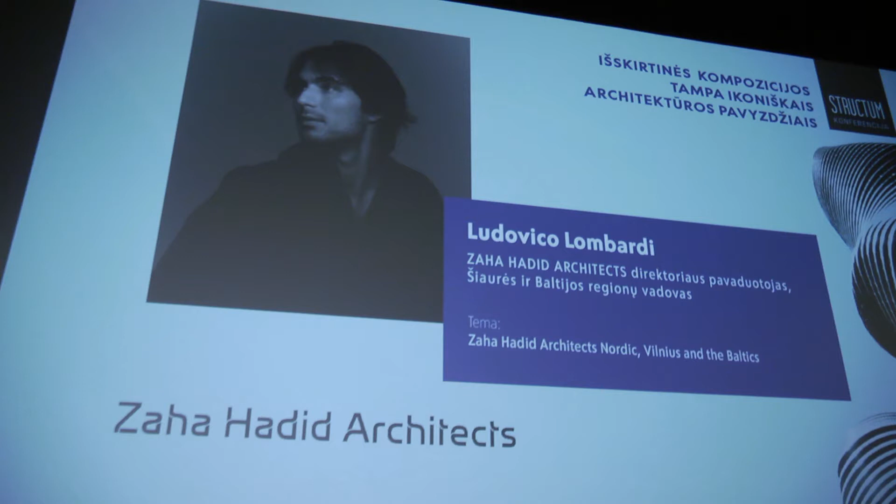So the presentation, of course, starts with ZHA and Zaha Hadid Architects. We have an international practice. We have offices in Europe and in New York, Beijing, Hong Kong, and hopefully soon other presence in the Nordics. We work globally, and our experience is varying in a lot of different typologies, ranging from cultural buildings to mixed use, offices, infrastructure, sports, and we try to contribute with our design intention in every sector that surrounds us.

We have a good portfolio of cultural projects. I'm not going to go into the details of any of them, but we will see some later on. Residential and hospitality, education and sports, and then transport. And ZHA started with a very strong tension about composition and about a visionary idea of representation in order to describe space and the complexity of space and the society dwelling in those spaces.

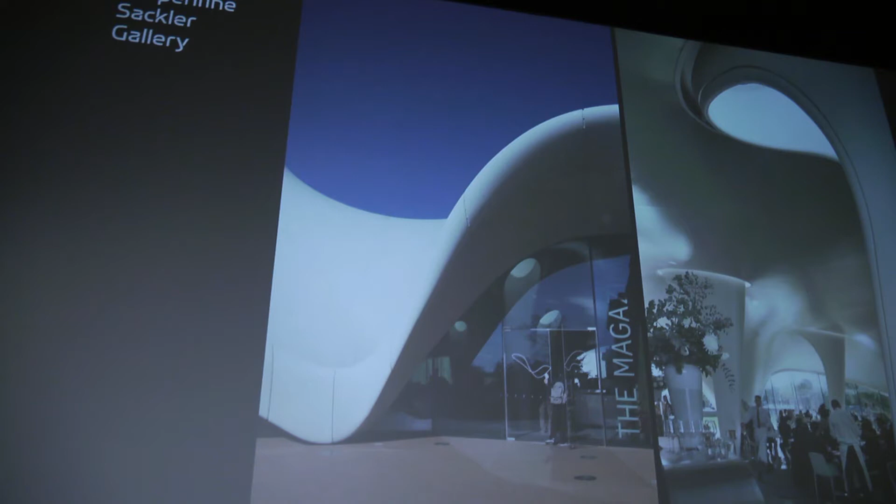We deal with different contexts. This is a project in London. It's an expansion of a heritage building. It's called the Serpentine Sackler Gallery. And we wanted to contribute with a complete juxtaposition of an existing heritage building with something completely new and somehow contrasting yet complementing the language of the context.

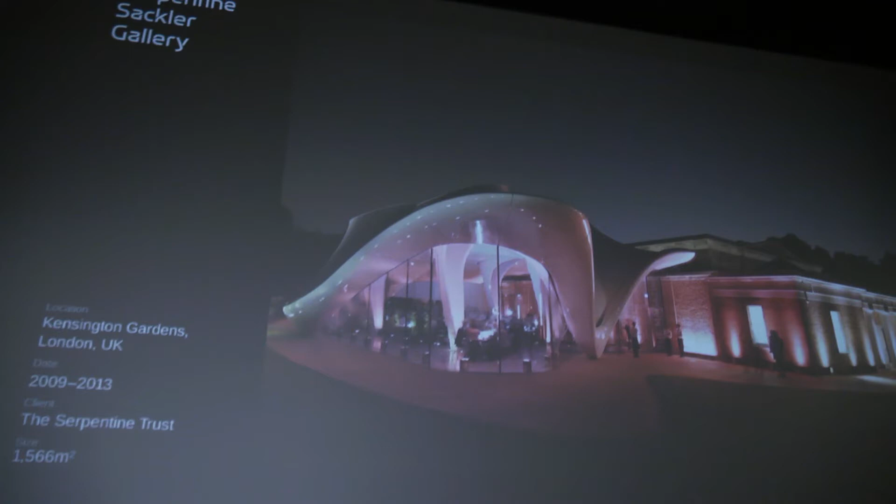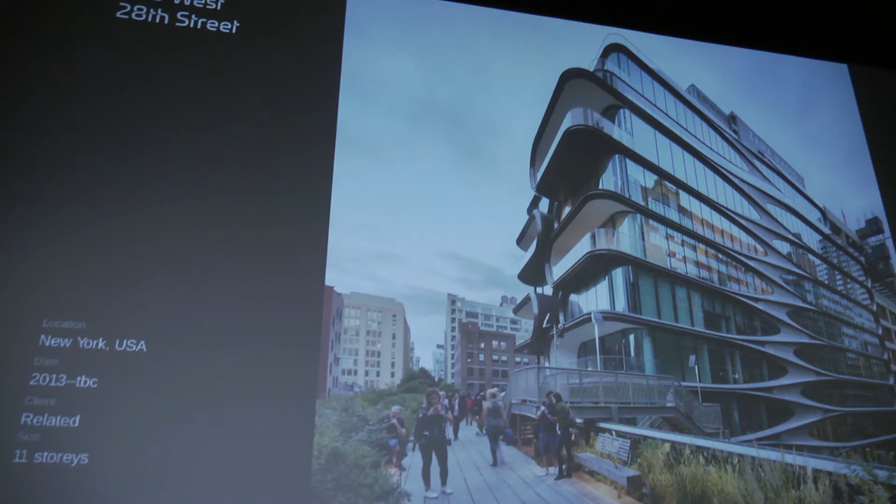We deal with a lot of different conditions. This is in New York. It's a recently completed project. It's a residential building. And this building has to deal with the rigidity of the Manhattan grid, which is, of course, a very interesting challenge, yet trying to create something which is dynamic in our own language. So in this case, we use the privacy between the different units to create this balcony articulation and a playful facade towards the High Line in order to create a more dynamic intervention into the block system of New York.

When we talk about context and sustainability, we normally don't only work on environmental sustainability. We also work a lot with what we consider social and economical sustainability, which are two very important aspects of sustainability in general as a direction to strive for.

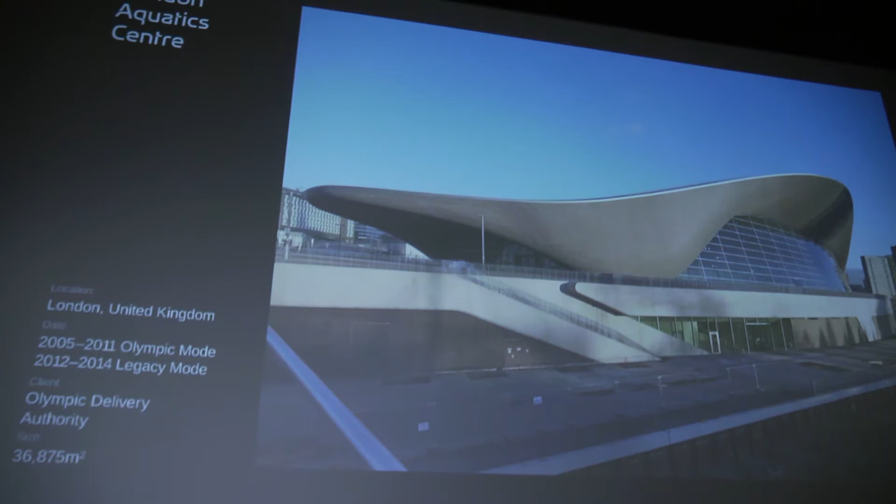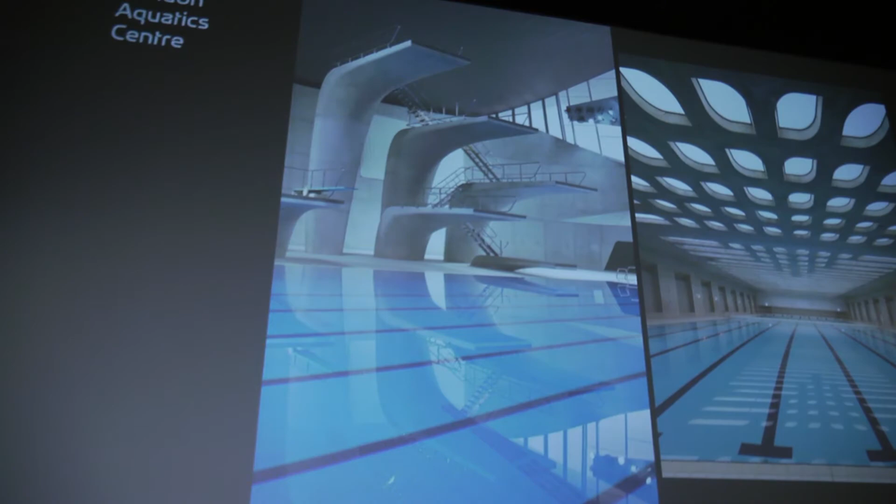This project is an Olympic pool, so it was done in a very fast track time, very tight budget for the Olympics in London. But when we designed it, we always had to keep in mind that the Olympic Games are a very short time span compared to the investment, and the pool was going to remain afterwards. So how can we design a building that can work in Olympic mode for a very limited time, but also can work afterwards as a community pool.

I mean, this is now open to the public. You pay, I think, €2.50 to go in and swim. And it's one of the most successful venues of the Stratford area where the Olympics took place. And the only way we managed to make a smaller, more intimate experience for schools and the community around the area was to engineer a roof system that's standing only on two points. So you can detach and reattach the facade and add extra seating when it's needed for big events, or otherwise bring back the facade and make a more intimate experience, which is more of a human scale.

So of course, the Olympic brief was not really targeted to the legacy mode, but as designers, we have the responsibility, when building such a venue with such an investment from different stakeholders, to also think about how it's socially sustainable in the long run.

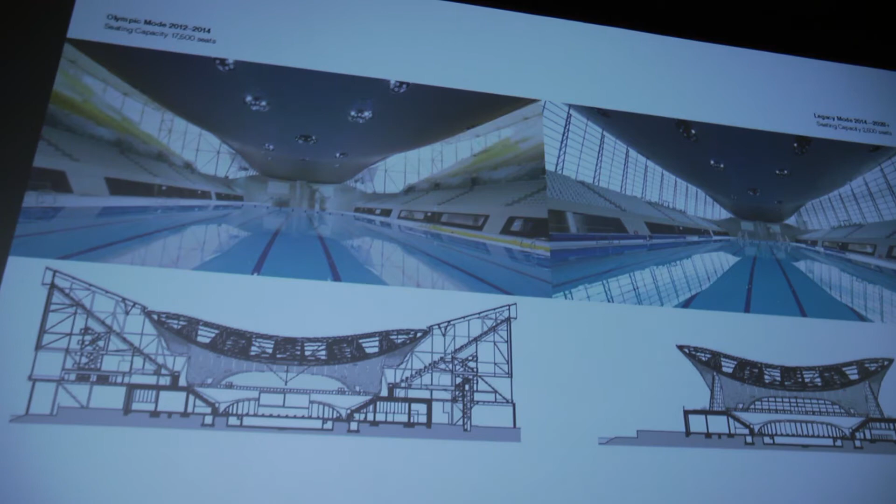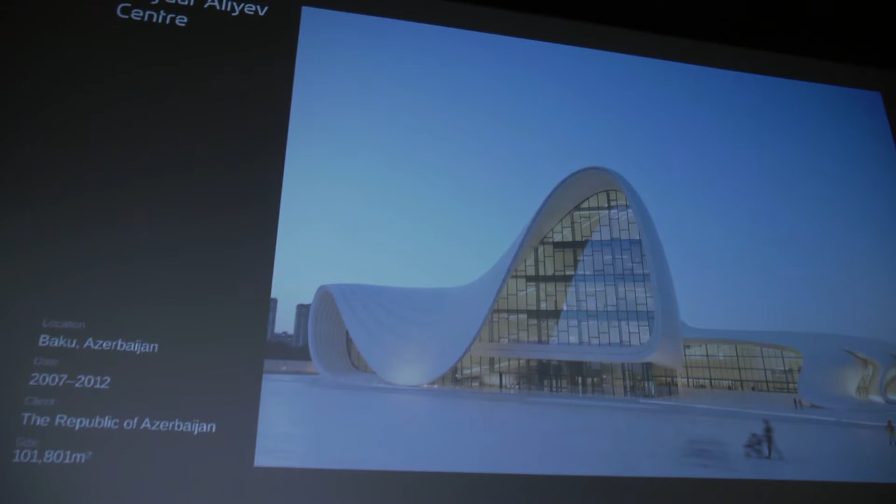Another aspect of our office is definitely the research part. So when we design any sort of building, we want to make sure that what we design, what we sketch, is actually buildable, and that the end result has the same quality of the initial ideas that we put into the project. So this is a project in Baku.

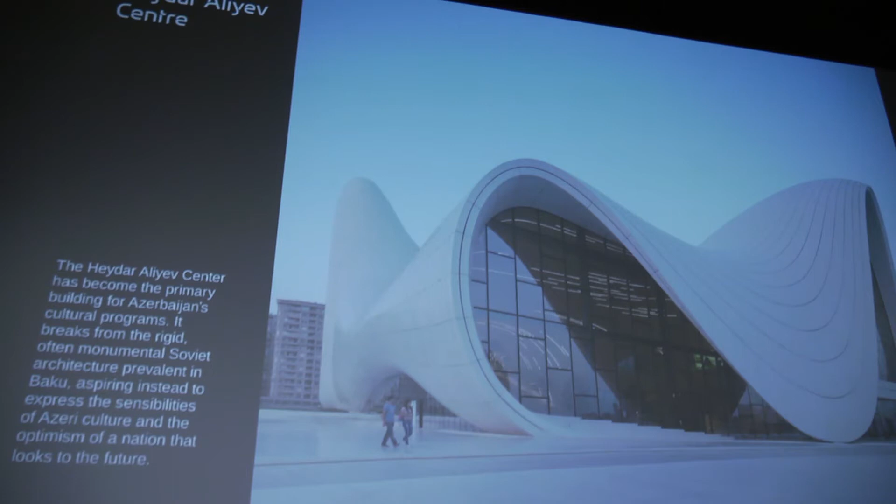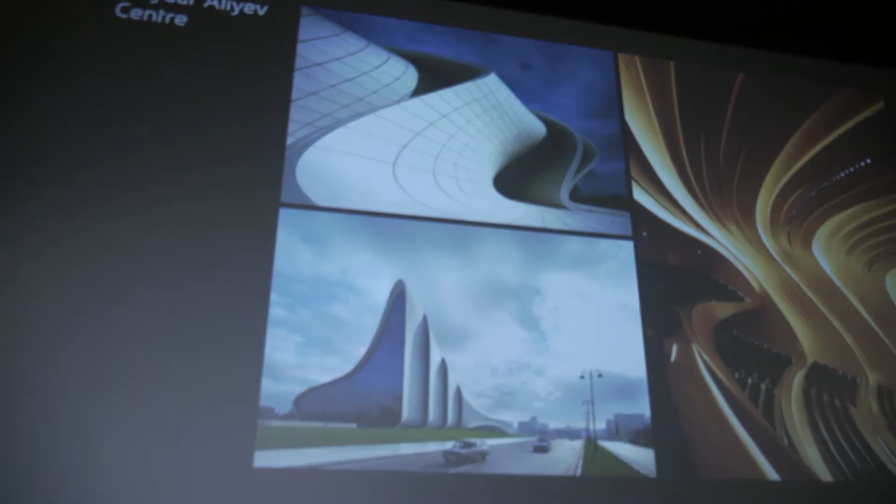The brief said to create 3 different buildings. And what we wanted to do was instead maximize the open public landscape around it and concentrate the function in one single building, which is articulated in 3 waves. It's a very distinct sort of design, and it might look relatively complex, but in reality, this is a very simple structural system, which is a space frame that is used for a normal industrial shed with a rain screen in metal.

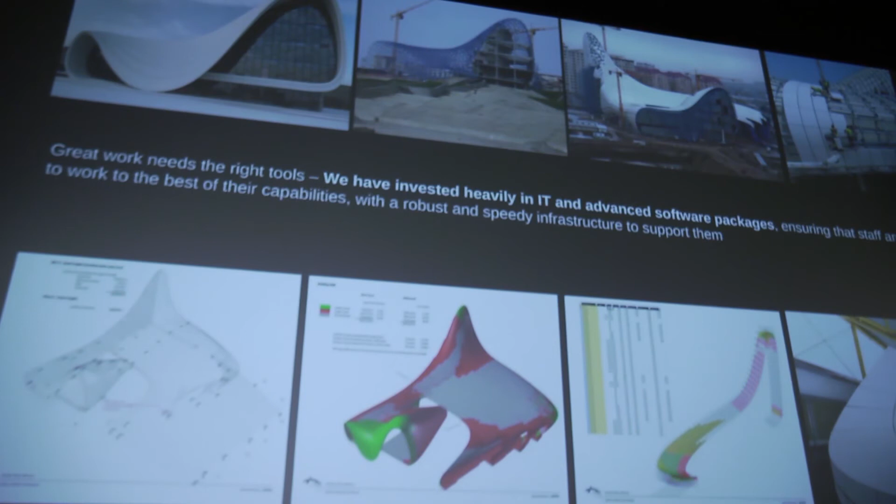And because we know that what we design needs to be rationalized, needs to be buildable in different contexts and in different regions, we actually take on ourselves the responsibility of going through a lot of detailing, of processing, of rationalization, buildability studies, talking to suppliers, talking to specialists, in order to make sure that our sketch is actually going to be built within the given final results. And we always strive to make something new out of the different challenges of every project.

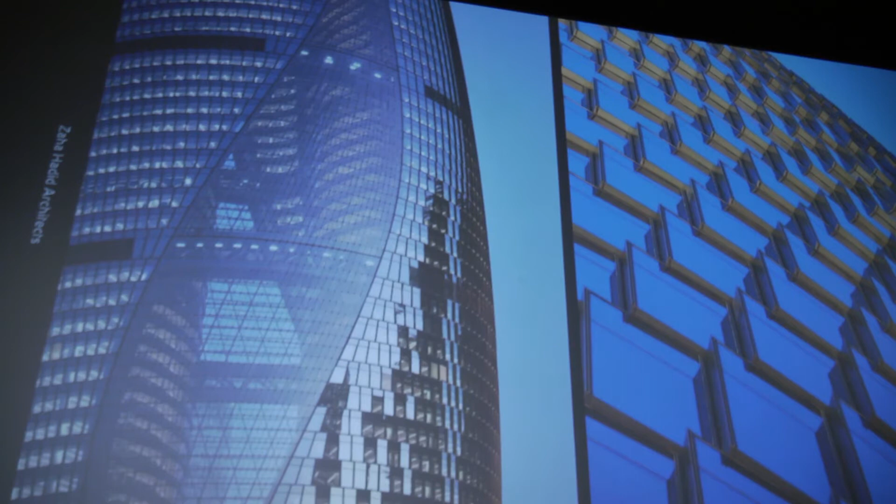And something spectacular. This is a project we completed in Beijing. SOHO China is the client, our current client. And this project is the tallest atrium built to date for a high-rise building. The reason why we have this atrium in the middle is actually because underneath there is a metro line going through. So structurally, it was not possible to create a central core system. We had to create a double core system, basically 2 independent towers, and then we wrapped them around with a single facade.

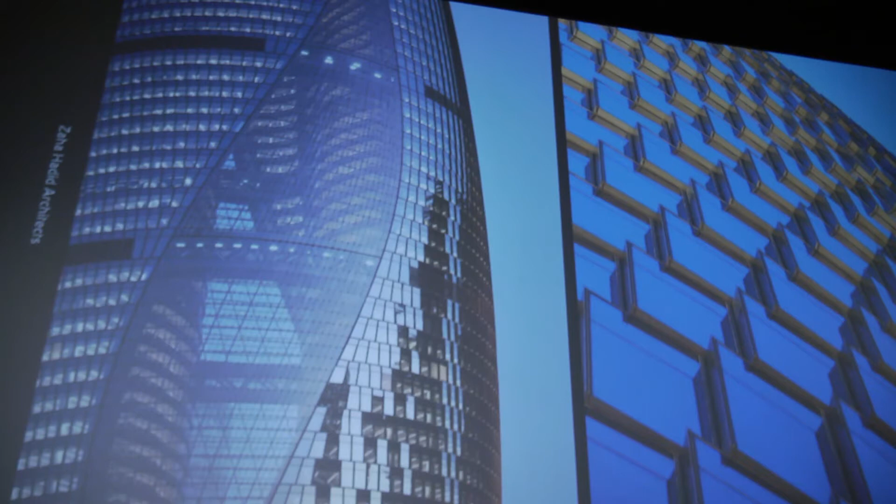The facade, again, looks like a very articulated facade, but it's all completed with flat panels. And inside, those are actually pictures from the building. You have this amazing effect of the spiraling atrium, which is technically the two facades of the 2 towers. So what we did was try to take the challenge of the project and make it into the design feature in order to create something unique and spectacular that can really become a new identity for the place around it.

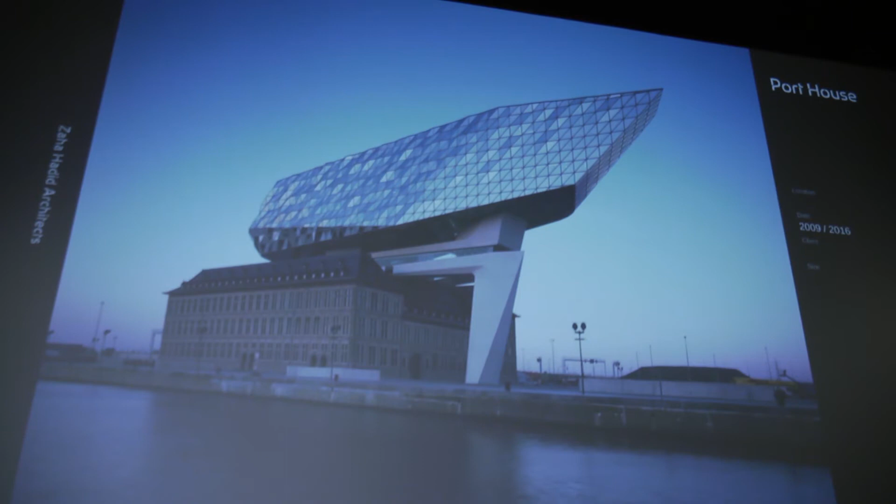Again, a completely different challenge. This is in Antwerp, a heritage building. The brief said you cannot do any structures inside the building, you cannot touch it. So what we did was participate in a competition with this crazy idea of creating a diamond on top of the existing Port Authority building. And the structural challenge is that you only have 2 legs, one inside the courtyard and one outside. And the building is completely detached. So we renovated the existing building, doubled the office areas, and this allowed us to create something spectacular.

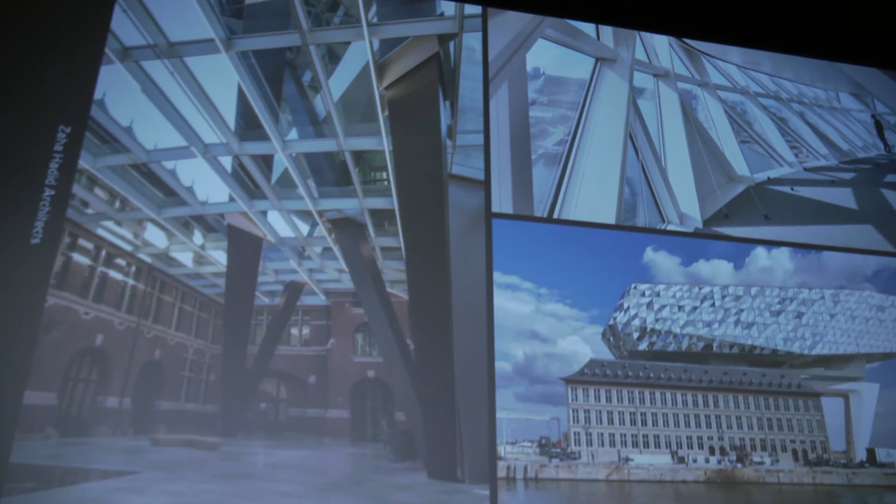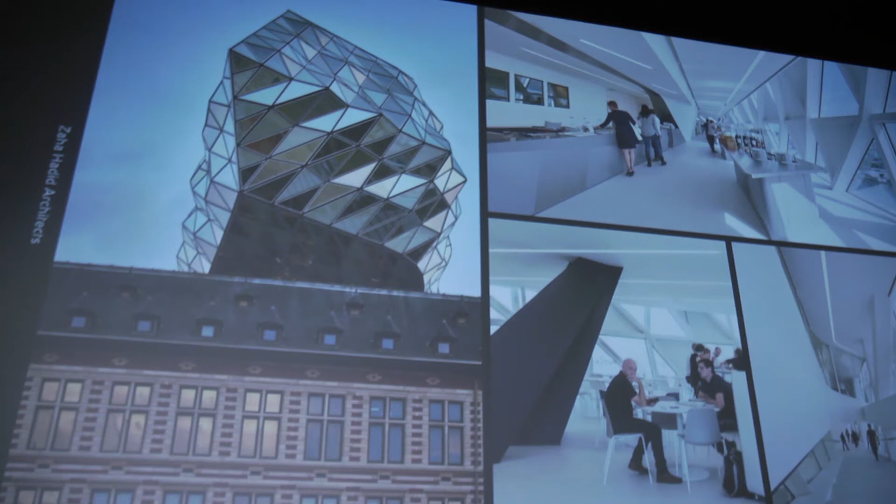And I have to say, we are very happy because this project was definitely a very flamboyant project, if you want. It was definitely not a subtle intervention, but it is now part of the identity of Antwerp as a city. When you come from the water, you see this beautiful diamond reflecting on the waterfront. There is no other building around. And now the people of Antwerp really recognize themselves in this project. So it really helps to create a new identity, a new vision for the community of Antwerp, not only for the client itself that of course wanted to have double the square meters of offices.

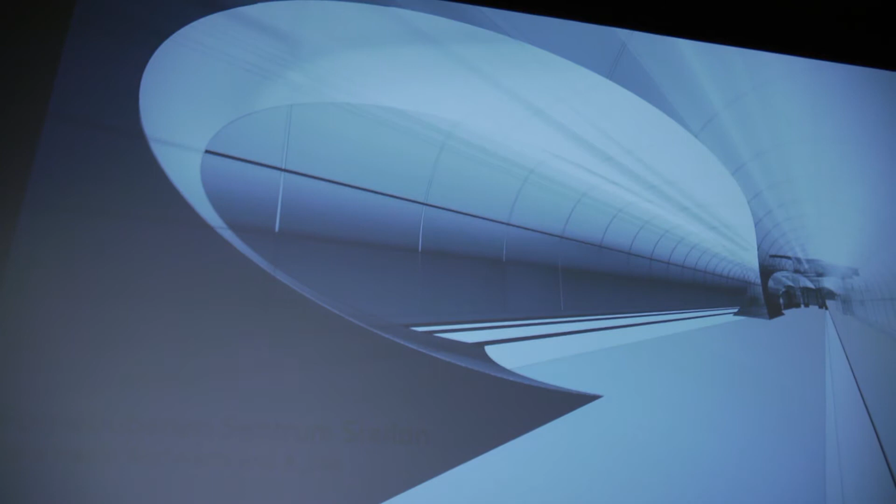Talking about getting closer to the Baltics, I'm personally responsible for all the projects we're doing in the Nordics, so Scandinavia, Finland, and the Baltic region. This is a project we have in Oslo. It's a metro station. We have 2 stations in Oslo; this is one of them. It's quite an interesting project because it talks about trying to bring underground some of the references and ideas that make people comfortable being in a closed environment.

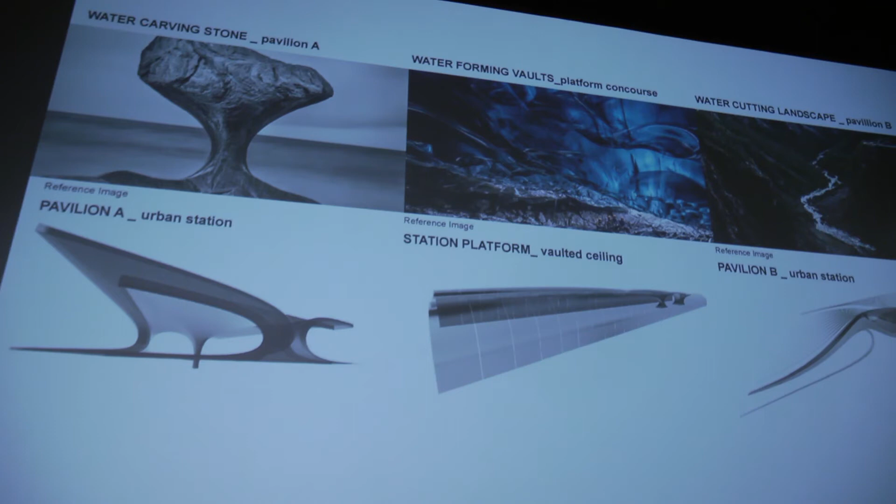The inspiration was clearly the landscape and nature of Norway, with the fjords, the crevasse, with these vaulted glacier ceilings and a sculpted, more stone-inspired entrance. And those are some of the views of the stone entrance, as we call it, the landscape crevasse, and then the station itself.

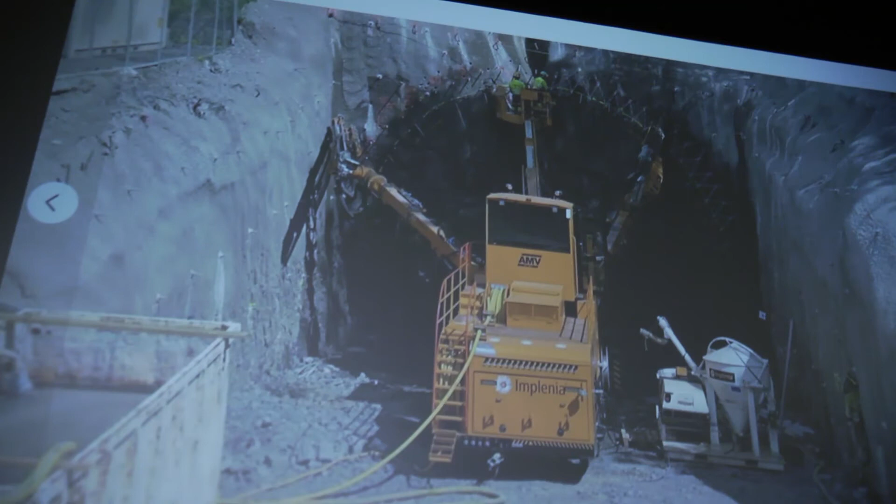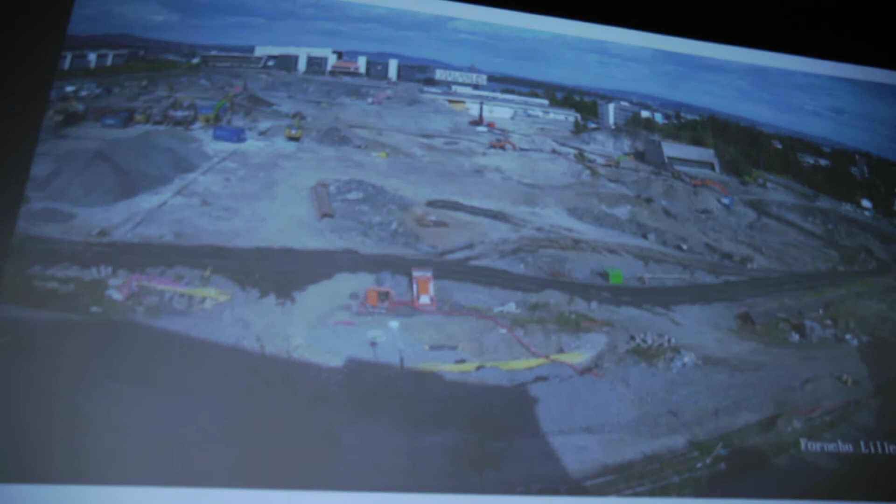And this project is actually on site. The excavation has started. There is a lot of infrastructure work to be done. It's 6 new metro stations, so it's a lot of tunneling to be done. There is a strong rock formation in Norway, so there's very heavy machinery happening on site. And this is the site of the station. And to date, apparently, it is the biggest site ever excavated in Norway. So we are, of course, proud to always try to get all the records in.

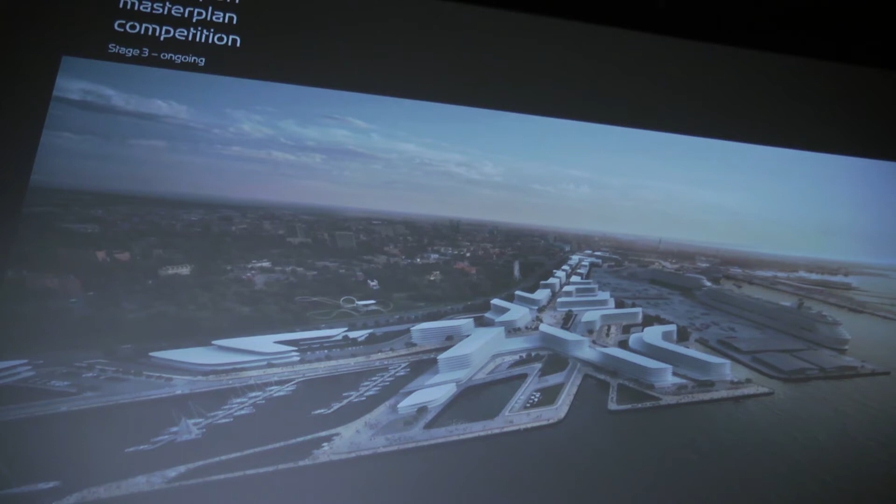In Finland, we just submitted a competition for a ferry terminal in Turku, and now going closer to the Baltics, and I'll come back to the issue of research and materials. The first project we did in the Baltics was actually the Tallinn port. So we won the competition for a big master plan for the port of Tallinn. And you can see that it's actually a very big area. It's 50 hectares of projects. The old city, you can see it on the bottom left of the screen.

And the real issue of the client, the Port Authority, was how do we bring the city back to the waterfront? And how do we actually bring the water back to the city line? Because the port itself is a big concrete slab without real activation. So we had to propose a vision, we had to do economic study in terms of programs, we had economic consultants to make sure that this was viable. And now that it's actually completed, the Port Authority is with the city of Tallinn doing the detailed plan of 4 or 5 different areas that they split the project in.

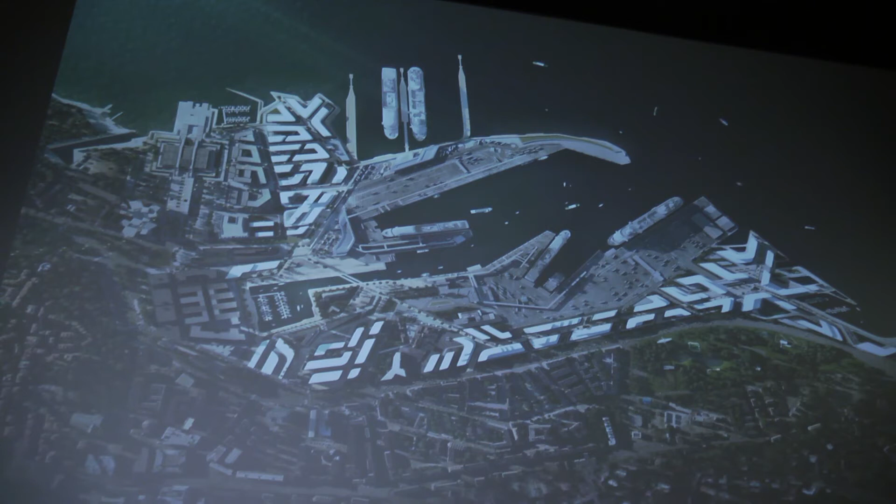But the whole idea of this project was about trying to create a continuous waterfront that was completely accessible as a continuous path for people to use without having to interfere with the logistics of the harbor. So it was all about pedestrian flows, bicycle flows, about trying to bring programs that would activate the edge slowly to bring the city and the people into the site, which is now, of course, a sort of no man's land, apart from when you have ferries coming in and out from Helsinki.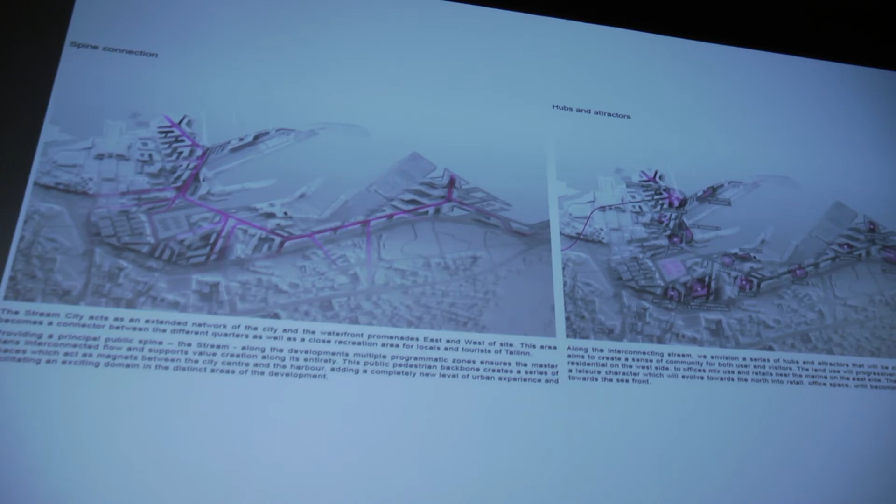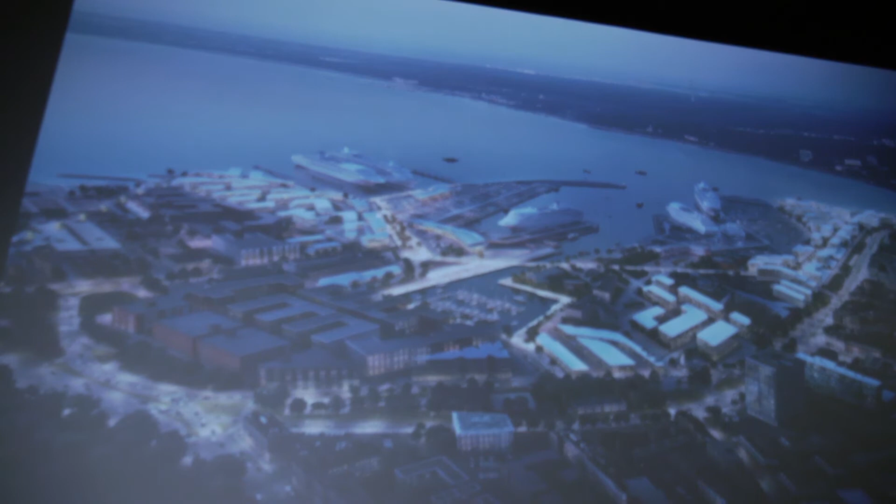So the whole idea was a spine, what we call the activation spine, or the pedestrian spine. So this is a continuous and uninterrupted system of circulation, like a High Line, let's say, that you have in Manhattan, but done, of course, on the scale of the waterfront of Tallinn. And I think it's been very well received, and it's something that is slowly taking place. Of course, the vision is for 2035. So it's actually slowly being completed. I already started the detail plan for the area on the left that you see on the screen, and now they're submitting the second area, and the third one is the top right that you see there.

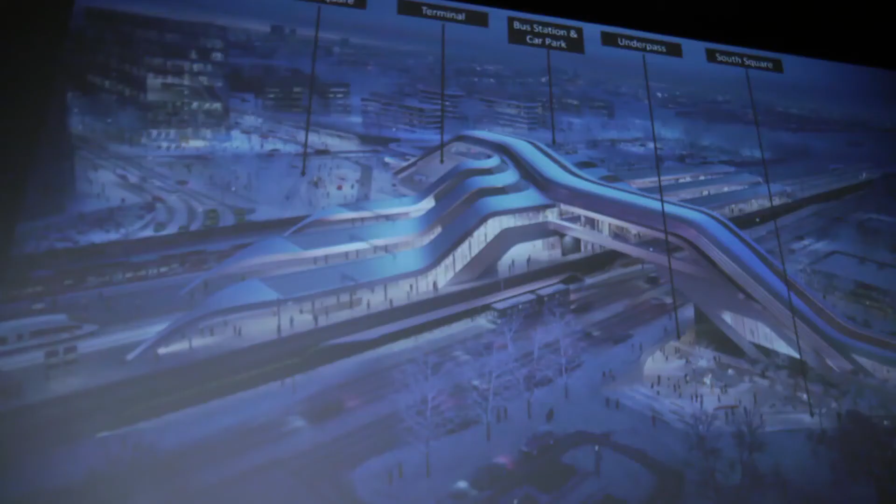So this project somehow introduced us in an interesting way to other opportunities in the Baltics. As you know, we're tendering now for the Rail Baltic station in Tallinn. It's quite a complex project. There is an underground passage. We wanted the station to act as a bridge. There are new high-speed lines that are coming all the way down to Kaunas, Vilnius, and then of course all the way to Warsaw.

And it's a very interesting project because it not only is an infrastructure project and not only is a project that allows a different, more sustainable way of moving through different countries, bringing together in much shorter time not only people but also goods, and there is a lot of interesting social aspect to it. But also it's important to see that transport-oriented projects have a chance to really trigger a wider redevelopment of the area. So by working on this project now, there is a lot of new development coming around that is really upgrading, uplifting, let's say, the local context. So transport developments are really interesting projects because not only do they fulfill their own initial function, but they have the possibility to really uplift a wider context.

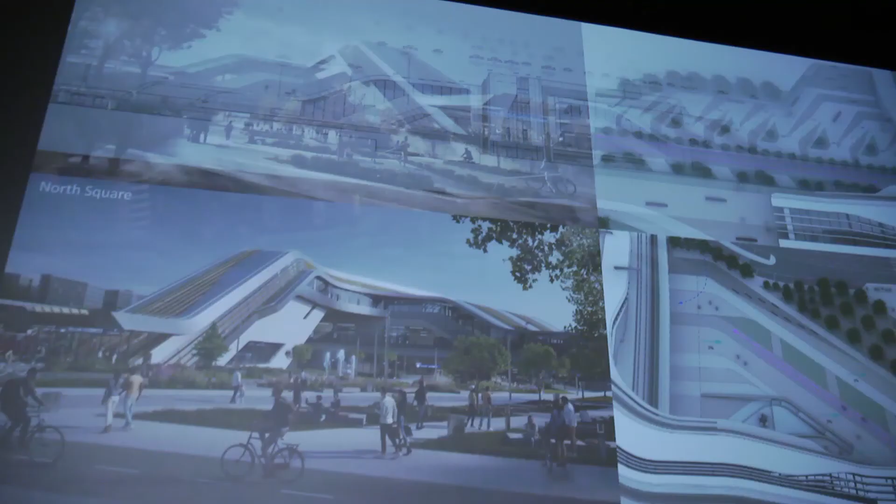So this project is a bridge station. There is an underground passage that you see over here, and our intention was really to try to create a continuous open flow between two different sides of the station, which is something that is recurrent, and you see it later also in what we're proposing for Vilnius. Of course, it's been a long process. There is a lot of implementation and rationalization, but as I said, we are in the tendering stage as we speak. So this project is going to start construction relatively soon.

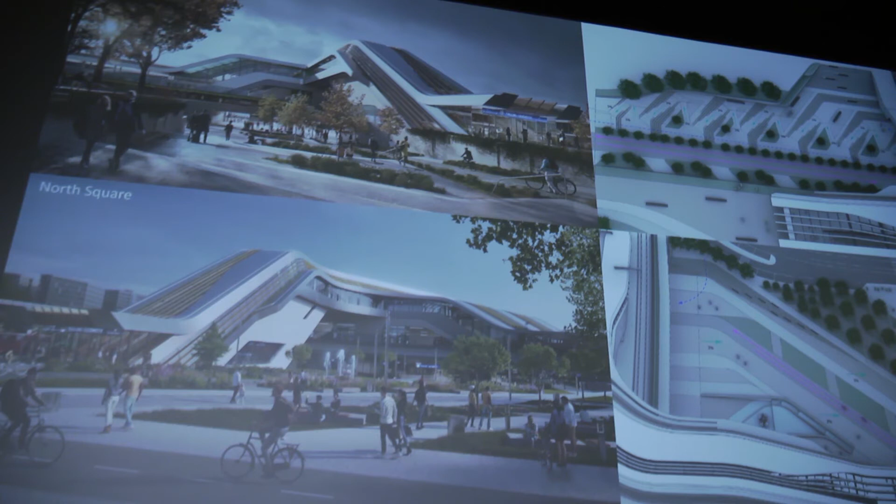And it's sort of the first station, in a way, on the long line. I'm waiting for Helsinki to start tunneling, but so far Tallinn would be the first station of the Rail Baltic line. And the whole idea is that you have natural light guiding the people throughout the station. So it's a very, very interesting, immediate way to navigate space.

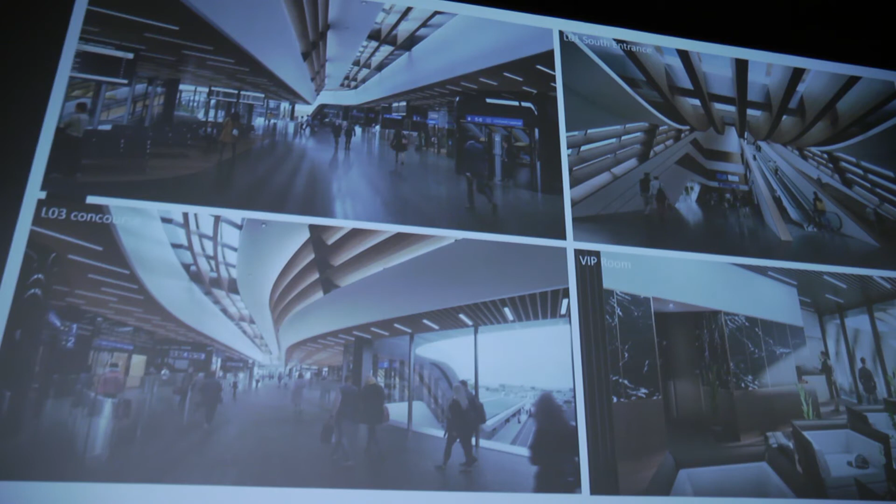Using the spatial design and the quality of the space to guide people is a really, really important way to implement a standard wayfinding strategy. So that's why we want to really play with these linear elements, natural light, visibility towards the side, and those are some of the shots of some of the interior space.

And it's all about phasing. Those are infrastructure projects. It's a very interesting headache of BIM modeling, coordination with different stakeholders and partners. Everything is done basically in 3D, and it was presented much better than me prior, but within our company we really strive to be on the front of the research on the way that we can deliver projects paperless in 3D, where the coordination is live with all the different partners involved in the project.

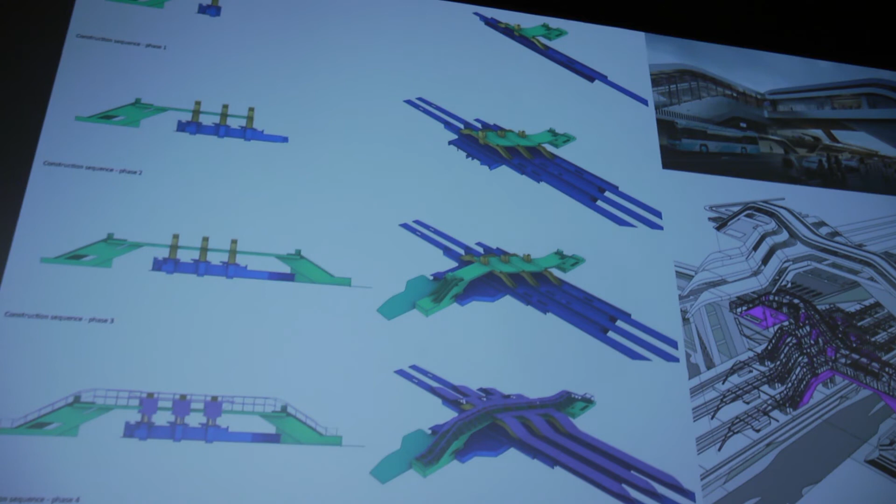So this is something that we're definitely bringing on board with a lot of different BIM requirements, quality control checks, to make sure that the project is sound and is actually buildable, and we are actually using the 3D model for the tender process as well. Those are a bit more of a boring side of the project, but it's really one of the parts that is becoming more and more prominent in our practice as part of our digital research.

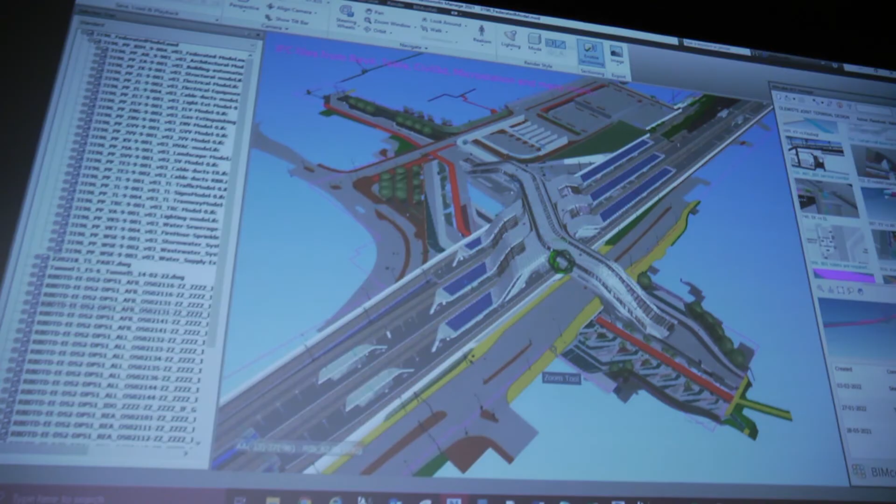The research I was mentioning before in Oslo, when we started looking at timber construction, is something that we have in our DNA. We always push the boundaries of architecture, try to do something that is not only spectacular, uplifting, but also something that pushes the boundaries of technologies and research. This project is a proposal we did for Riga. It's a competition, unfortunately, we lost.

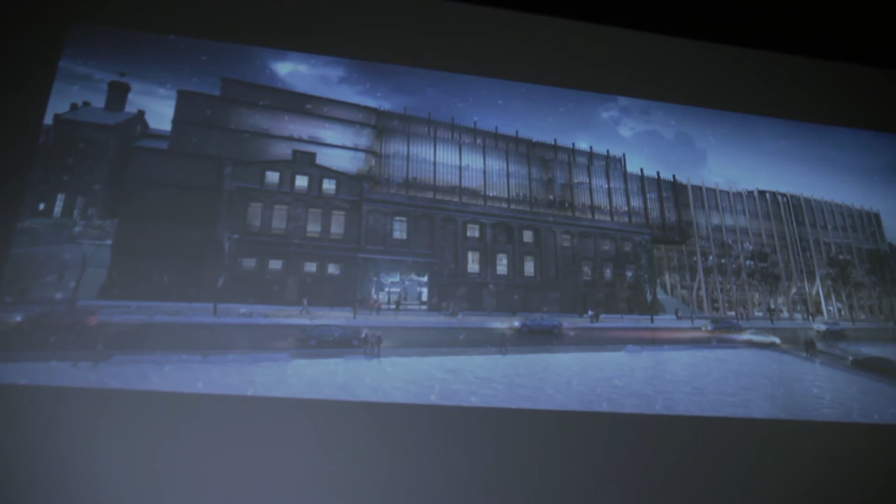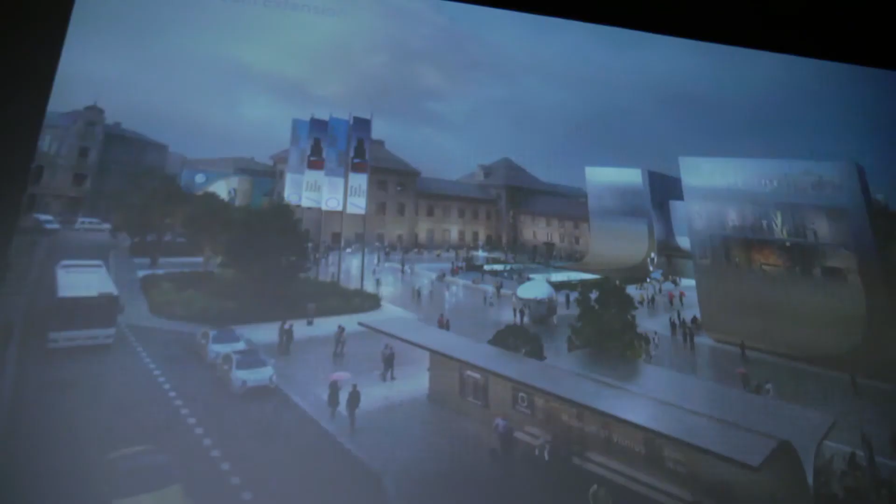But it was very interesting because it was about the use of timber construction, the way we implement that in our projects, how we deal with its different constraints. There was an existing building, there is a series of parts repeating one another, and we tried to vary the materiality while keeping the same idea throughout the project. And you get to see some of this idea of mass timber construction that is becoming more and more recurrent in our projects.

Then we come finally to Vilnius. We participated in a competition, we didn't win, and it was for the Radvila Palace. It's a really nice area, really nice and lively, especially at night. So it was a very interesting brief, and we really wanted to create something to contribute to what is now a sort of in-between space. It looks like a bit of an unutilized area or a missed opportunity.

The competition was for an expansion of the remains of the existing palace, rebuilding the symmetrical presence of the original volumetry of the building. So we tried to work with something relatively neutral, this idea of scoops that gently bring the volumes down to the ground, having a sunken plaza to lower the traffic and free the ground floor for possible new activations, and then a vertical circulation, almost like a core, but an empty core with only circulation to distribute the flows on the different sides.

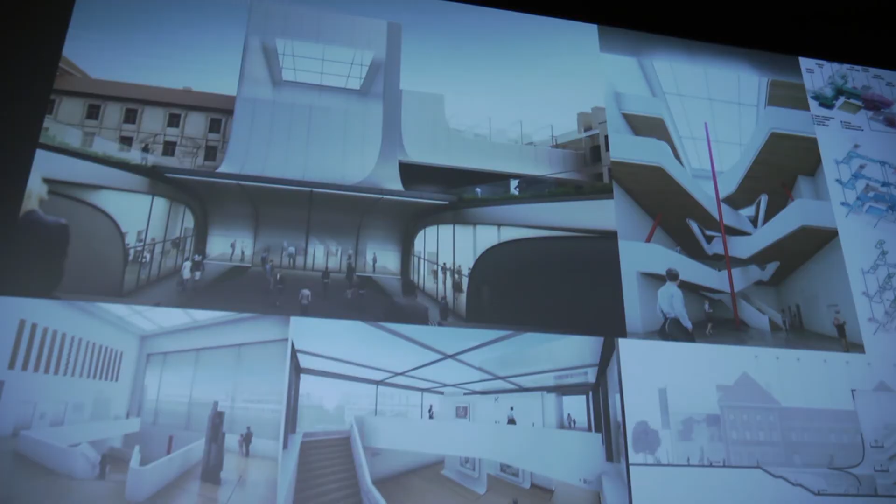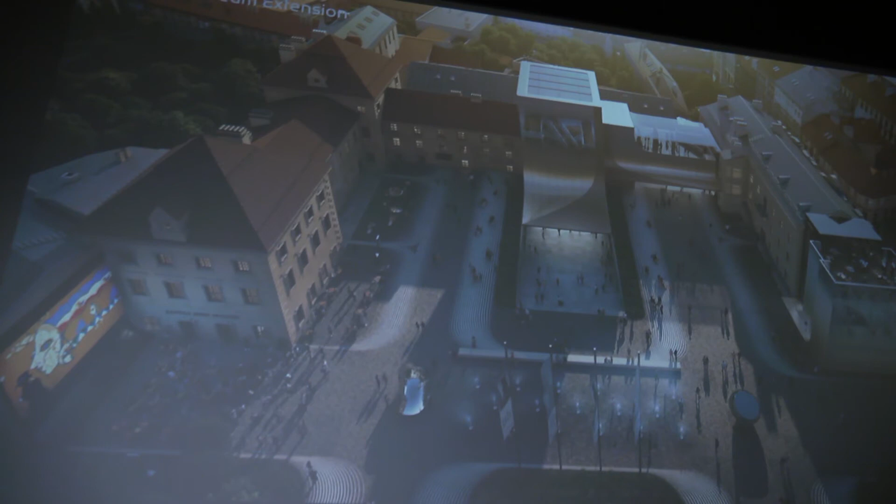So this was the idea of the sunken plaza, trying to rebalance the volume of the existing building with a new extension or rebuilt volume, because it was very true to the original one. And then another opportunity that came up in Vilnius is the Business Stadium Center. We're working now on the development of a new mixed-use building. Of course, it's inspired also by the presence of the Brutalist building that is fronting it.

It's very interesting because this idea is a very strong gesture, and we wanted to bring the same attention to this very gentle but sharp curve into the design of the facade. Somehow lifting, talking to that building, but not just mimicking it. Trying to use it in a different way so that you could relate, yet not so immediately. So there is always a bit of discovery, and you see the similarity, but it's not obvious.

So this project, of course, is a process as well. We're now working on the best way forward in strategizing on the programs, the different types of use and mixed use. There is a little offering on the site. But that's the idea for the project itself.

And then finally, what we're doing for Vilnius Connect, this was a project that was really dear to us. As I said, infrastructure projects are very interesting because they're a lot more than just a way of moving and a lot more than just a transportation solution.

It's really something that affects the way people relate to different contexts, to different areas, to different communities, to different nations. So they have a very strong impact in the way that this can activate the context immediately, but also the relationship with the different and far away places. And of course, it's a lot more sustainable than just driving a car through.

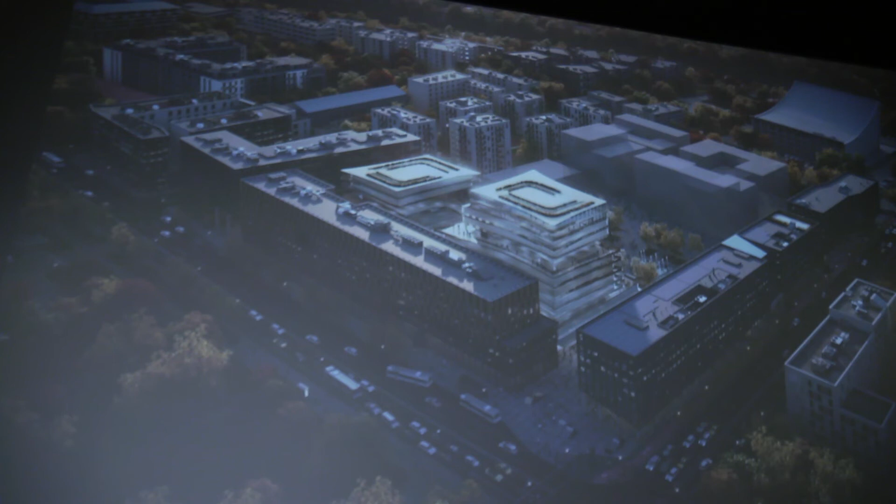And somehow it is a literal way of answering: okay, we have an existing building, there are protected views and heights, how do we deal with that? But it's a playful way to take that and make it one of the drivers of the design of the station, of the new station terminal.

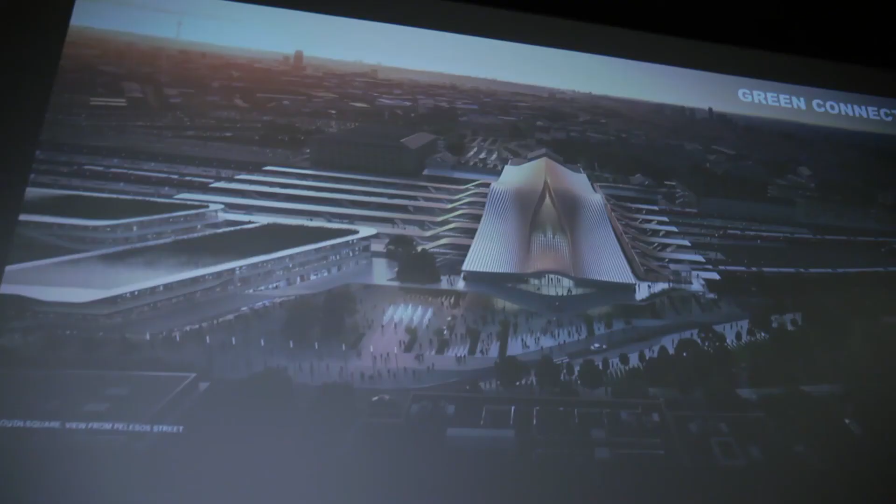As I said, we are doing the Tallinn one, and now we finally got through most of the bureaucracy for the Vilnius station. So this is slowly taking momentum, and I think that our main goal was to really try to not only fulfill the initial brief, but to give something that was contributing, as I said, to a lot more than just the station function itself. So there is a series of components.

Of course, there is an existing rail track. So what we wanted to do was to create something, again, that has a similar language, so there is a coherence when you move through the space and you perceive the space. So when you see the bus terminal, you start recognizing a language that is talking to the new station language, but it's not directly the same. So you want to give hints and suggestions to the users, but you also want to create diversity.

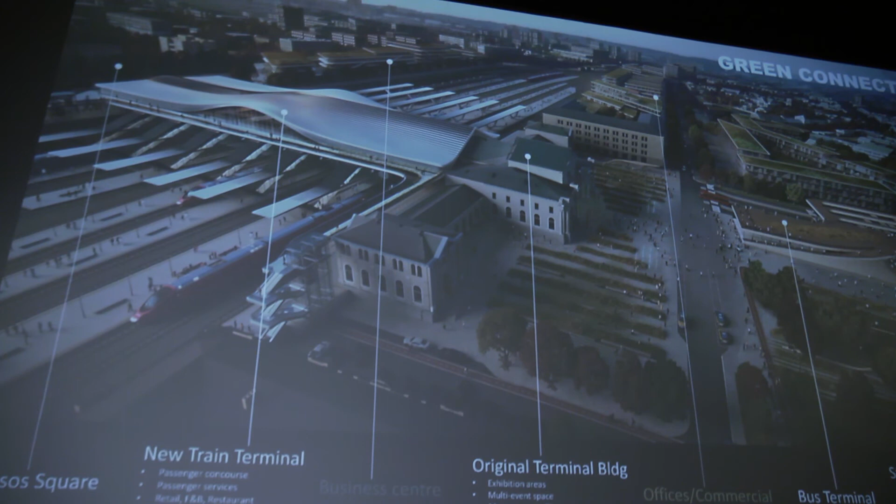So the bus terminal is oriented as an extension of the square, because originally, when the square fronting the station was designed, it was symmetrical on both sides of the axis of the station. Now there is, of course, the existing bus terminal, and the new bus terminal was an extra element eating into the public space. So what we decided to do was to scoop inside and try to lift and bring the landscape on the roof of the bus terminal in order to maximize the area used for the square.

As I said, the idea of the station talks a bit with that, because you're taking the roof of the existing station and then you're morphing that into the two elevations and then inverting it to create the exit on the opposite side. And this gives quite a good opportunity with a simple gesture to really create focal points on the tracks, on the new station entrance, and then on the existing one.

There is a lot of complexity to this project. There is the idea that this station is going to have an open passage for the public to be able to cross the rail even when the station is closed. So that was very important to us, that the station itself is also acting as a bridge for the public, so that you can really relink together the two sides that are cut through by the trench of the tracks at the moment. So that was a very important point.

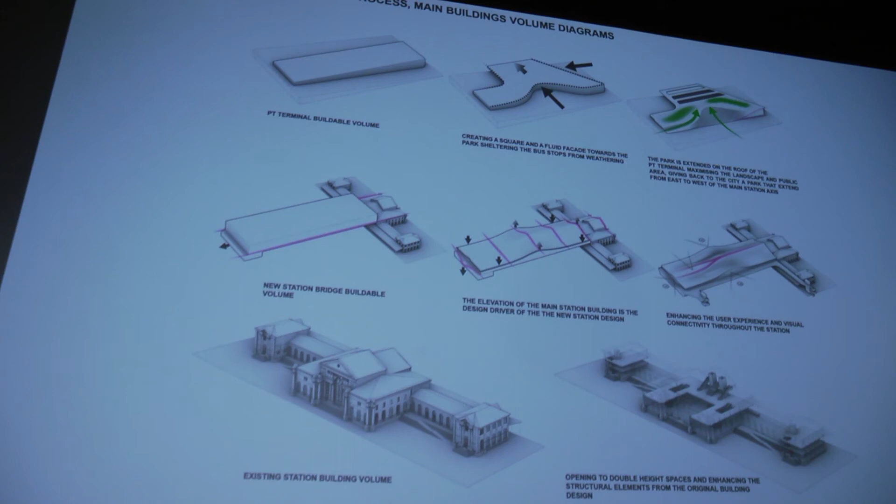And then the other point was, of course, to try to free and rationalize the circulation on the existing square that you see on top, in front of the existing station building. So these two main drivers started distributing and talking to the whole organization of the space. So you can see here the context in place. You can read the bus terminal with this idea of the square that lifts up and becomes the roof. Clearly a revitalized existing public landscape square.

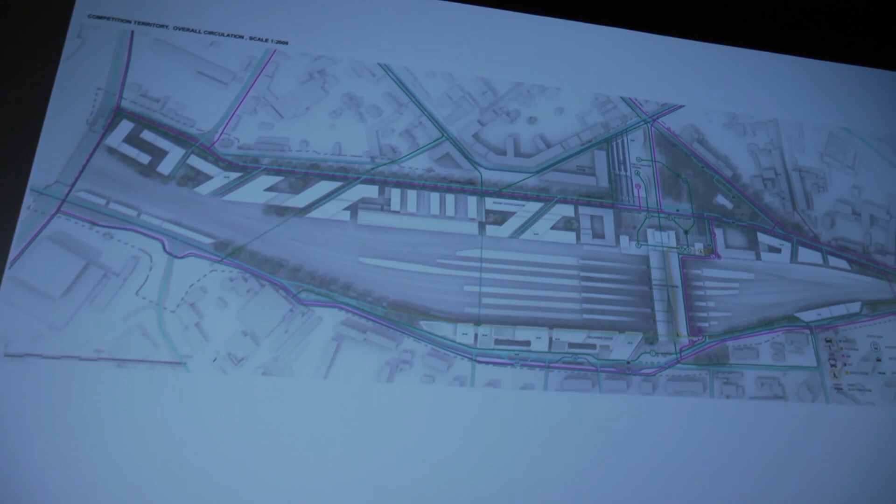The new station and the way it bridges in a very straightforward way the tracks area, and then the new station on the south. And then there is a proposal for a master plan that is, of course, just a guideline to give an idea of the different possible developments that could happen in the surroundings.

We do a lot of material research. We do a lot of sustainability research. So in-house we have environmental sustainability research, and of course this is something that we are bringing into the projects from the beginning in order to make sure that we have an approach that is not only complying with the current standards, but an approach that is also making an extra step to really become a benchmark for sustainability, design qualities, and a lot of other different functions.

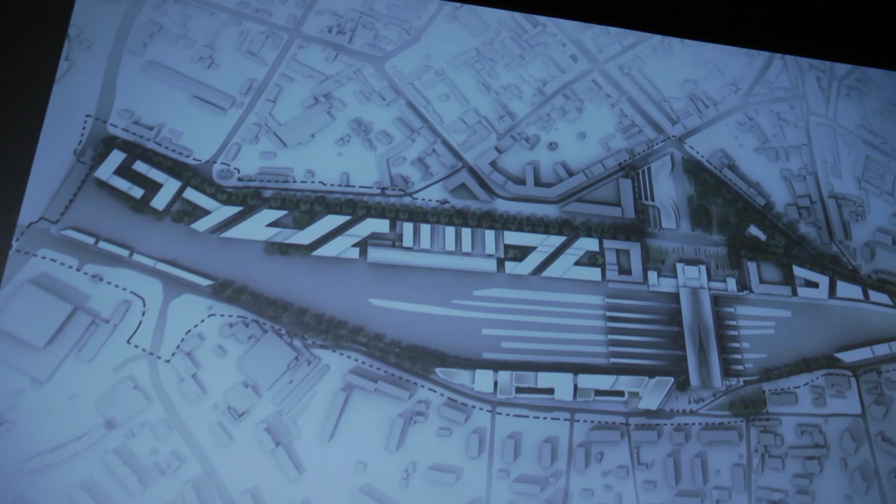This is one of the slides showing the relationship with the central axis and what I was talking about before, the fact that there is a bit of an imbalance and asymmetry, and we try to really create a new square on top of the bus terminal roof instead of cutting back more and more this public offering.

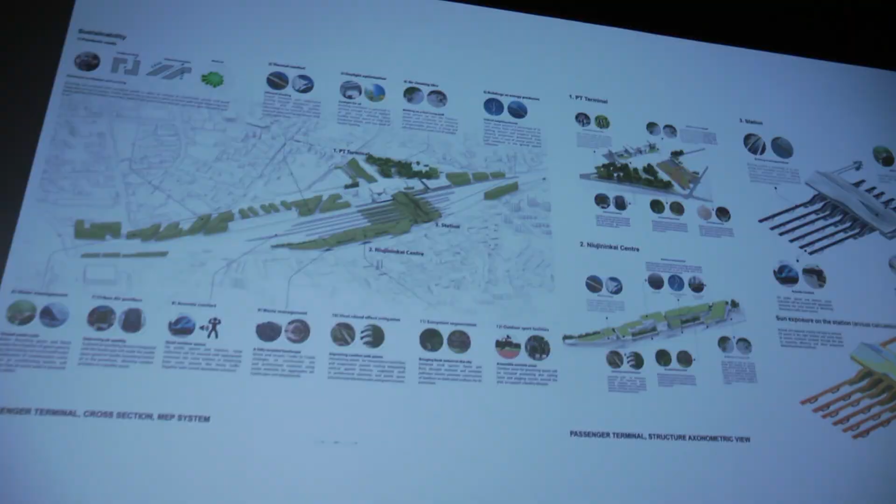We work with Land, which is an Italian landscape architect. We work with them in a variety of projects. I think they're really good because they really understood the sensibility of the site and the idea that you had to somehow really strive to create something that was a continuous surface, something that could be almost understood as a shared surface, so that the car almost can disappear in between a continuous public landscape.

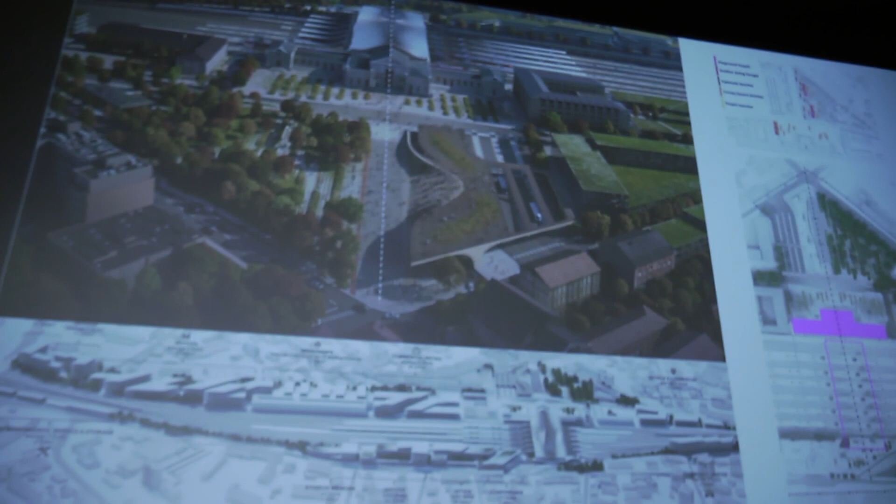And we really like the idea of this linearity that they used in the project, because that somehow is really giving directionality from the setting out of the stone pavings all the way to the planting system. And it's really interesting because then it crosses with the tracks, but at the same time it really creates a more legible grid and circulation path on the floor.

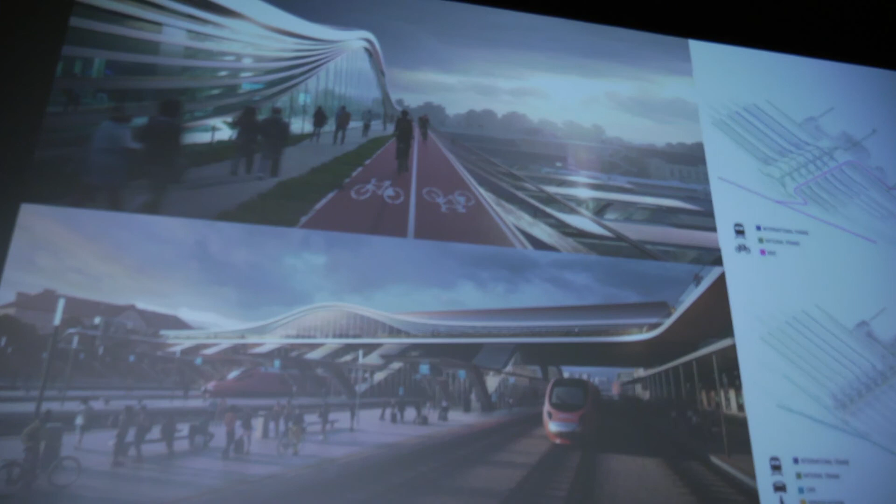And inside, we try to bring in our research on timber construction, different types of solutions for CLT structures, and of course this is a station, so it has its own complexity. There are a lot of requirements for bomb blasting, fireproofing. So the whole idea was to go with a very solid base, like a concrete block in the base, steel constructions, and then the timber was actually for the level of the concourse and above.

So of course there needs to be a very strong concrete solution for the platform and the vertical circulations, because that has a lot of requirements for trains. Well, I'm not going to bore you with that. For a train that might hit the structure, it needs to sustain a lot of impact, and of course timber wouldn't be an option in that case.

Then we have a steel deck in order to get the span as column-free as much as we can, sitting on top of this core, and then we have the timber structure that sits on it, and then the steel connection for the roof.

In terms of program, there is a double deck on the concourse, and I think it's again part of the offering that is a plus. You have this eye looking towards the track lines, so you can actually wait for your train, look down, and have this experience of being visually connected to the track. We also want to create this idea of multiplying the offering for food and beverage, waiting areas. So we have this double program, like a mezzanine level.